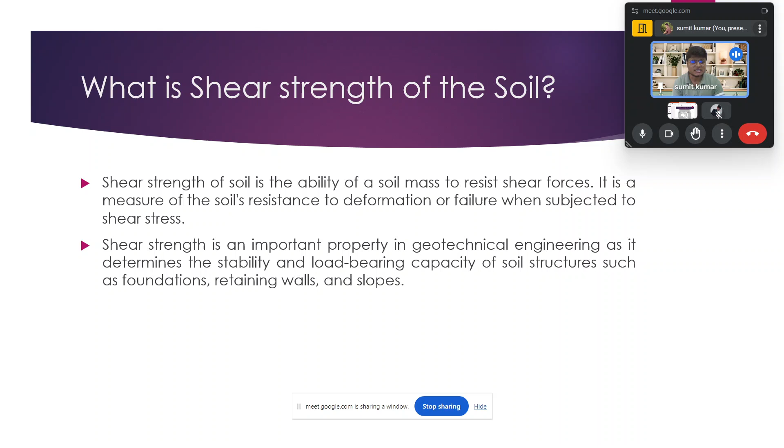So, what is the shear strength of soil? We have understood why shear strength matters. The shear strength is the ability of a soil mass to resist shear forces, and is a measure of resistance to deformation or failure when subjected to shear force or shear stress. So shear strength is an important property in geotechnical engineering. We also understood the parameters on which shear strength depends, like cohesion and angle of internal friction, and how they give strength to the soil.

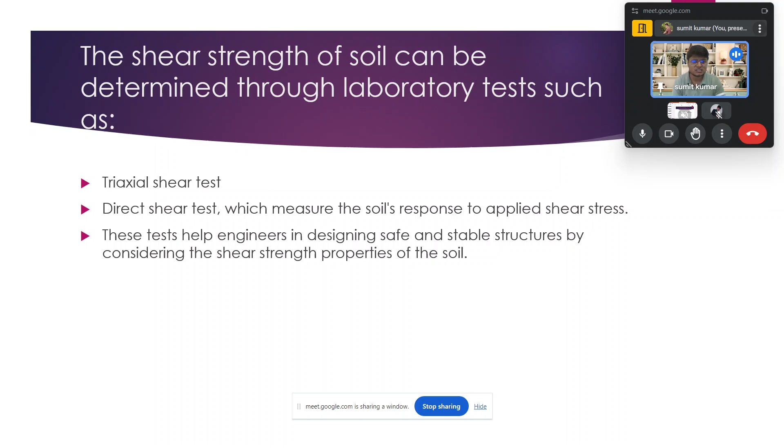We came to know about some tests like the triaxial test, direct shear test, box test, and many more tests, including shear tests. We will come across those tests during this class and subsequent classes, because this week and next week we are covering those tests, and then we move forward.

Apart from that, we understood the importance of studying this topic, the importance of studying shear strength, because during the first session I said that whatever we study must have some purpose, must have some understanding of why we are studying it.

Is there any importance of studying those things? From our childhood, whatever we are doing, we always ask questions. As a child, we have a thought process to ask questions on everything we see, but as we grew up we forget that habit of asking questions. But whether you are studying or doing anything, you have to ask yourself: what is the importance, why, what and why are the most important perspectives one needs to ask during their study or any work, in an organization or anything you are doing. So what and why are some of the most important things one needs to ask themselves in order to reach a solid conclusion.

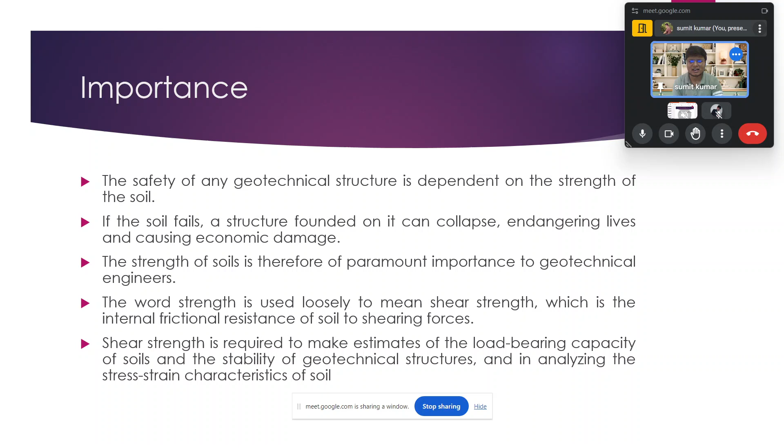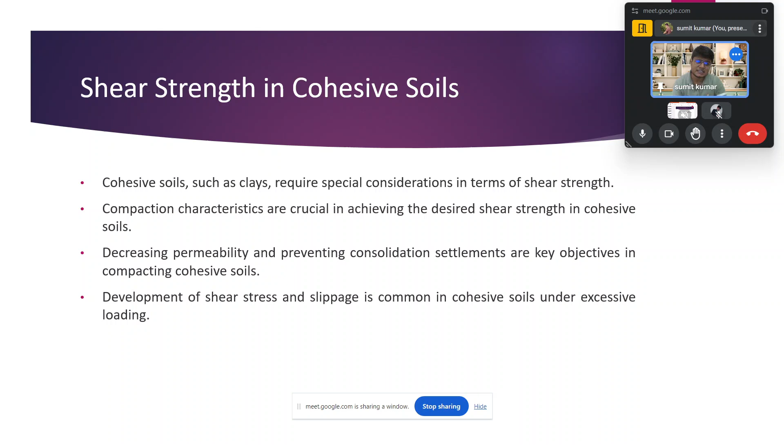Okay, so that's not part of the syllabus, I just added that. So we have understood the importance. Apart from that, we have understood the shear strength in granular soil, that is sandy soil, how it provides the strength. And in addition, we also understood in cohesive soil how the intermolecular force of attraction, or how the excessive loading, impacts the shear strength in that type of soil.

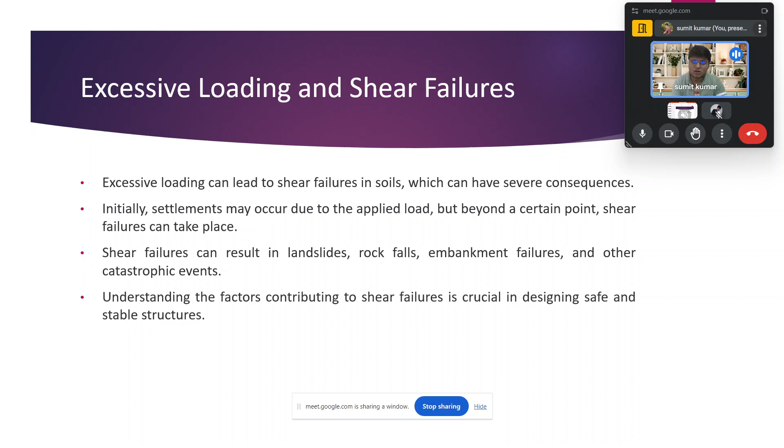Okay, so we will see about those things as well during our tests, like the direct shear test and the triaxial test. Apart from that, we have understood about factors like the state of stresses in soil, that is the normal stress, shear stress, and the interrelation like shear strength equal to C plus sigma tan phi.

After moving from here, we go across some of the important things like the Mohr circle, and the Mohr circle is one of the most important things. So we understood the state of stresses like the maximum principal stress, minimum principal stress, and on the basis of that we developed understanding of how the Mohr circle problem is solved. And I also gave you some problems during our last class, which I think you have gone across, so you get a better understanding.

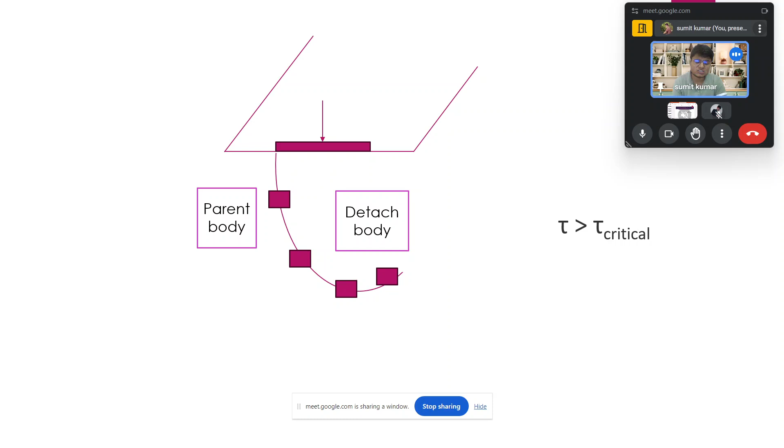And when I say this, those people who have gone through YouTube, or maybe who are going through YouTube at this point of time, you need to understand that solving the problem by yourself, by your hand, is very much important when you are developing understanding about any topic. Because if you have command on theory but you are not solving numerical problems, the practical implementation, you are not able to achieve the develop the understanding.

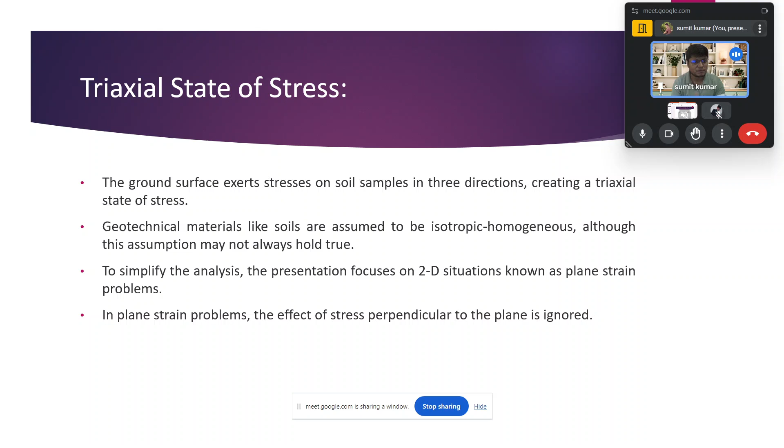So okay, we have talked about these things. We have talked about the triaxial state of stress. We have understood how we combine - actually the factor takes place in the field in 3D, but how we are taking it as 2D and solving the problems through the Mohr circle. What is the maximum principal shear stress, minimum shear stress, we have understood, and the interrelation to find the shear strength and normal stress is also understood by us.

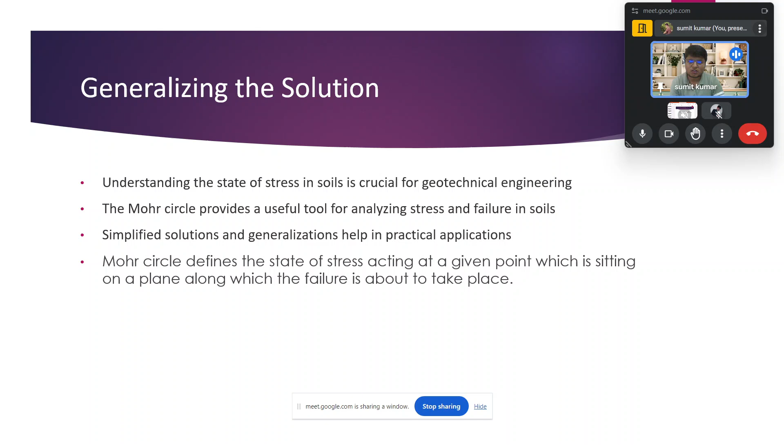Apart from that, we have seen the property of the Mohr circle and the sign convention to understand the Mohr circle. Moving forward, we have developed a generalized solution in Mohr circle analysis. What is the major principal stress and minor principal stress is understood by us. And afterwards, through this diagram which is over here, you understood that how...

in a Mohr circle, we are able to find the major and minor principal stress. And what do we mean by that? What do we mean by the zero shear plane? And how are we able to find the radius of the Mohr circle? All these things are covered here in very detail during the previous class.

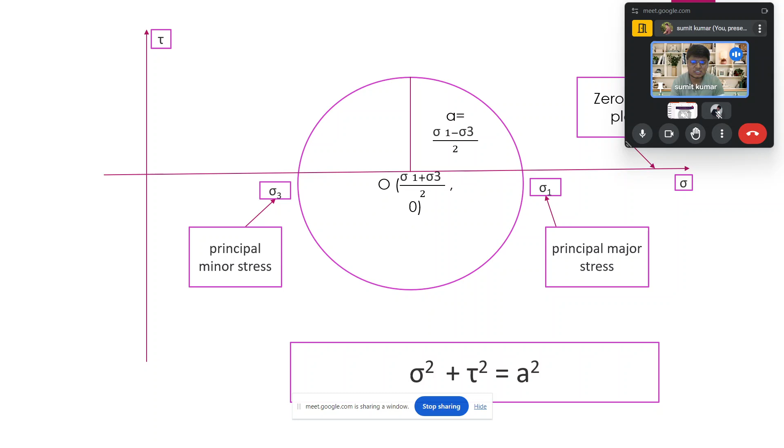And up to this, I wanted to revise the concepts with you. Apart from that, the interrelation to find the maximum principal stress and the minimum principal stress is also presented, and the angle formed between them, or the plane at which it is occurring from the current plane, is also found through this Mohr circle. So we have understood those concepts, and now we will move forward to our next concept which we are discussing right now. Okay, I think up to here everything is clear for everyone.

Okay, I feel there will be no problem in anyone's mind. So, we are talking about the Mohr-Coulomb failure criteria. In the last class, at the end, we talked about this thing as well.

We talked about how the shear strength is a function of normal stress, that is sigma, and how we calculated sigma in the previous class. So when the cohesion and angle of internal friction are known to us, we calculate the shear strength as C, that is cohesion, plus sigma tan phi, where phi is the angle of internal friction.

With the help of this interrelation, we understand the shear stress on the failure plane. The interrelation S equal to C plus sigma n tan phi, where C is the cohesion, sigma n is the normal stress, and phi is the angle of internal friction, gives the shear stress at the failure plane.

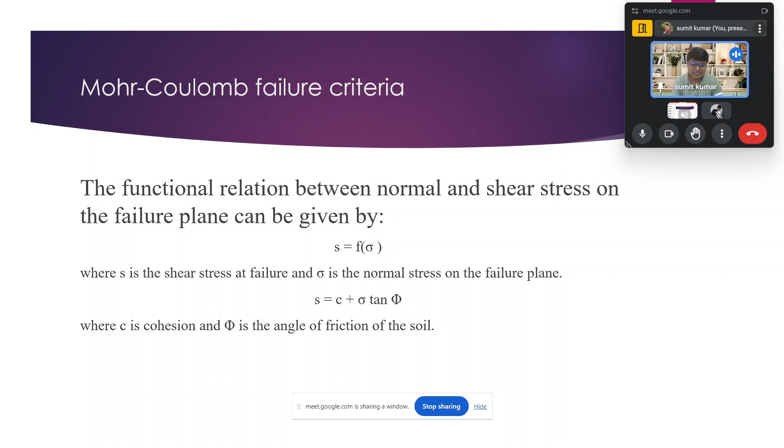We will talk about this interrelation very often at many points as we move forward. Okay, now let's understand through this diagram what we want to convey.

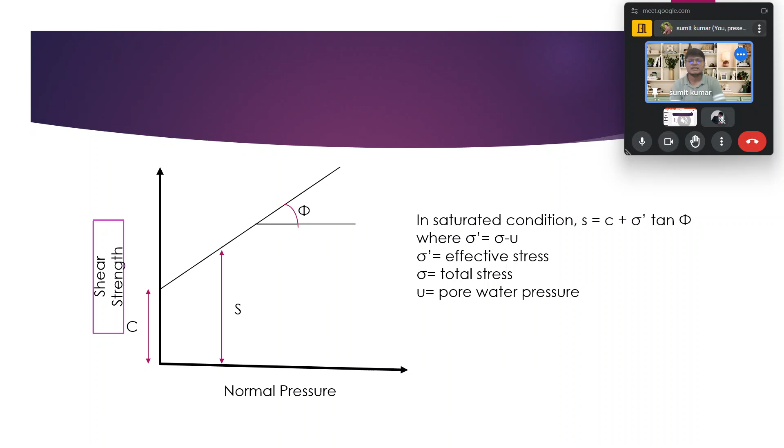Now we will talk about some key concepts. I have talked about some key concepts in the previous class, so I will take that over here, then move ahead. We have talked about the shear strength of soil. The key concepts are shear strength, effective friction angle, what is meant by cohesion, what is meant by apparent cohesion. I will give a one-line definition for everything, and that will be there in the presentation which will be shared with you. I will give one-line definitions and then move ahead. I think I am audible.

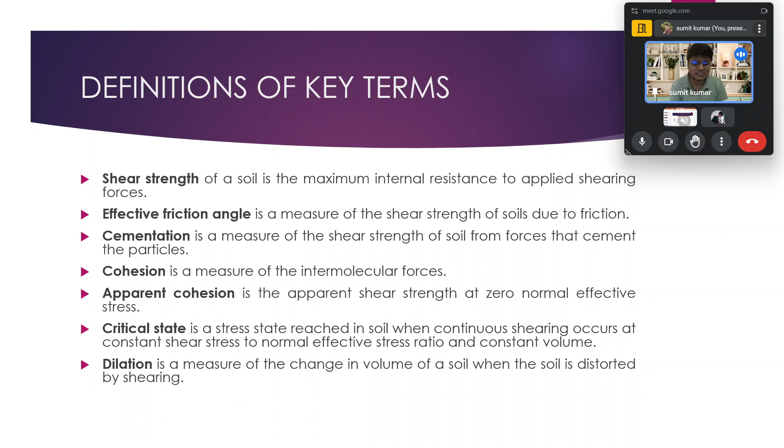Dilation, as the name suggests, is the change in volume. It is a measure of change in volume of soil when the soil is distorted by shearing. Whenever you have gone across any software packages, you have seen that they ask the value of cohesion, friction angle, modulus of elasticity, Poisson ratio, and apart from that, they also ask about the dilation angle. So dilation means how much change in volume capacity affects the soil in one way or the other. That factor is one of the most important things. I think up to here everything is clear.

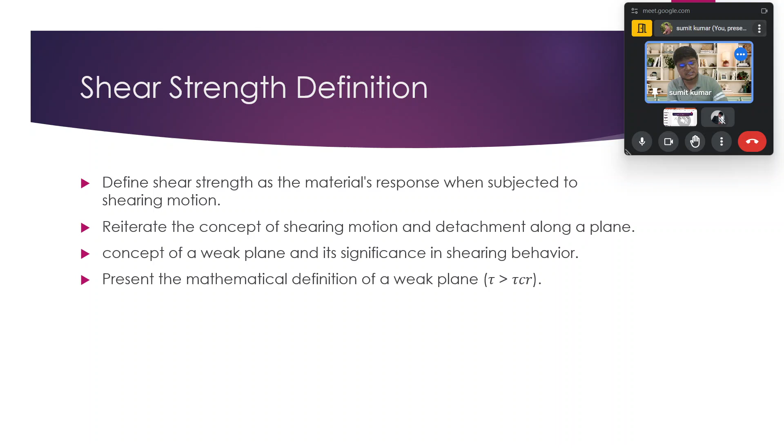Now we move to the next slide, and you can see in this slide there is a simple term written over here, that is the shear strength definition. We define shear strength as a material response when subjected to shearing motion, because there is strength within the soil, but it comes as a response when we apply stress over there. So shear strength is a material response when subjected to shearing motion, and the concept of shear motion and detachment along a plane. It is a concept of a weak plane and is significant in the shearing behavior. Mathematically, when we talk about a weak plane, the shear stress applied is above the critical shear strength, then it will lead to failure along that plane.

Now we talk about the factors. There might be some factors which are key aspects due to which the failure takes place across any plane or the other. So what are those factors? You need to know, yes or not? Yes.

So we talk about the factors. The major factor causing the shearing is earthquake. There are many factors, but during an earthquake the shear strength gets disturbed. We talk about liquefaction, where the shear strength gets reduced from the value it needs to have. Earthquake can lead to relative motion between soil layers, and if relative motion is there, the stress applied on the plane must be more than the strength of the soil at that plane.

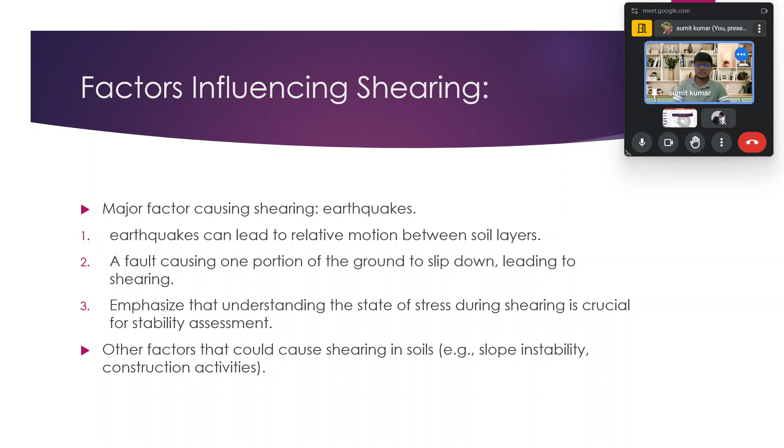Now we talk about some of the applications and significances. Talking about applications, the engineering significance of understanding shear strength in geotechnical projects: shear strength analysis helps in designing foundations, retaining walls and slopes. The role of shear strength is most important in assessing the stability of natural and man-made structures.

When we talk about natural and man-made structures, we mean human activity like construction and expansion can alter the state of stress in the soil mass, which leads to problems at those places. We also talk about incremental changes in stress that can lead to shearing, especially along weak planes. So its significance is also very high.

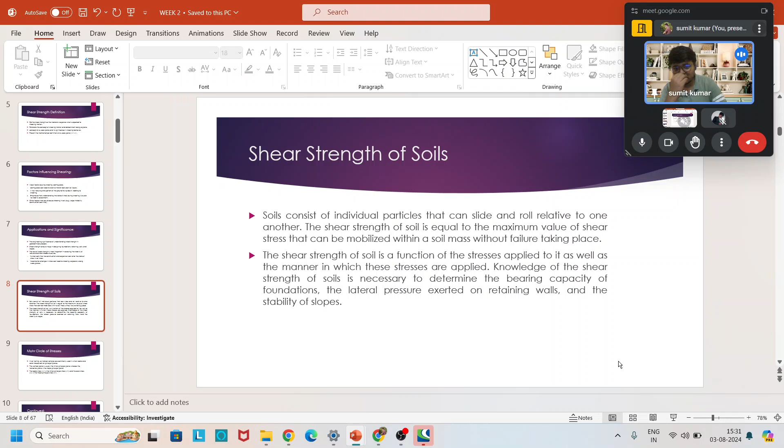We talk about the shear strength of soils. The soil consists of individual particles that can slide and roll relative to one another, and the shear strength of soil is equal to the maximum value of shear stress that can be mobilized within a soil mass without failure taking place.

The shear strength of soil is a function of the stresses applied to it as well as the manner in which the stresses are applied. Knowledge of shear strength of soil is necessary to determine the bearing capacity of the foundation, the lateral pressure exerted on the retaining wall, and the stability of slopes.

As I have discussed this point in the previous class as well, shear strength is the most important factor before moving ahead with any construction work—whether that work is going on at any site, be it development of infrastructure projects, or construction of any institutional or residential building.

Before that, the soil report is very important, and the soil report consists of parameters like cohesion and angle of internal friction. On the basis of that we determine the strength, and we are able to tell how much load the soil can sustain. If we need more than that, we need to improve the soil for that condition by replacing the existing soil at that site with new soil, or by providing some improvement in the soil in order to sustain the load we want to apply at that site.

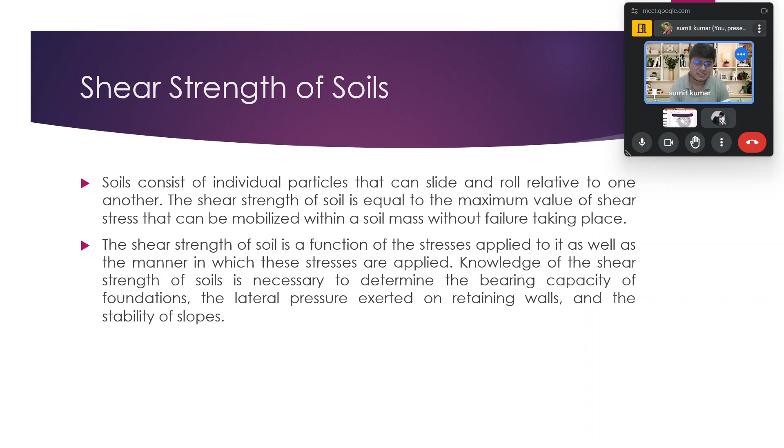And it is valid for all projects like road construction, railway construction, or any other construction. So it is one of the most important factors.

When we talked about the Mohr circle in the previous classes—in soil testing, cylindrical samples are commonly used in which the radial and axial stresses act on principal planes. The horizontal plane is usually the major principal plane, whereas the vertical plane is the minor principal plane. When we talk about radial stress, its representation is sigma r, which is the minor principal stress.

This is also said to be sigma 3, and the axial stress sigma a is the major principal stress, which is also said to be sigma 1.

Okay, now I will show you one of the images from which you can see that the axial stress is sigma A, which in this case is the major principal stress, and sigma 3, the radial stress, is sigma R, which represents the minor principal stress. And over here you can also see the theta angle. Just for clarity, I have shown this image to you.

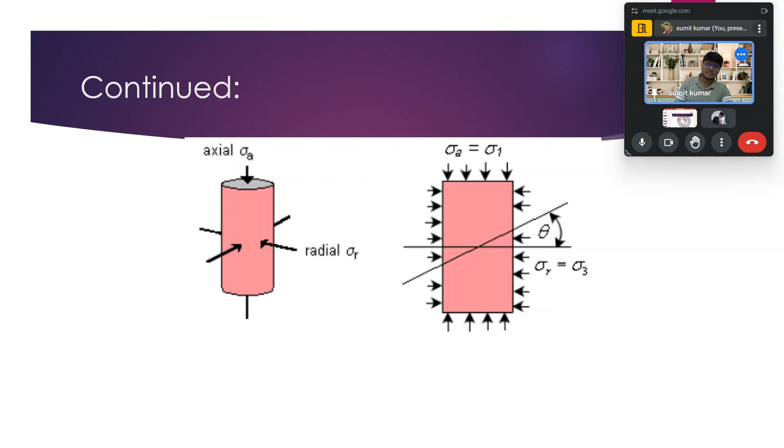Now I will talk about the Mohr-Coulomb failure criteria. There must be some criteria due to which the failure takes place. What is that criteria? We are going to discuss that.

When the soil sample has failed, the shear stress on the failure planes defines the shear strength of the soil. As we discussed in our previous session, the soil has some strength and it fails when the stress applied on that section bypasses that value. So how do we come to know it has bypassed the value it can hold?

There is a very simple example of that. Suppose a soil section, or a simple example like this box. This box has strength to bear a load of 100 kilonewton. When we apply that load on it, after the application of 100 kilonewton, it will move. So its strength is 100 kilonewton.

At a value up to 99.99 kilonewton, it can resist, up to 100 kilonewton it can resist, but if we apply 100.01 as well, it will not be able to resist that much force and it will start moving in that direction.

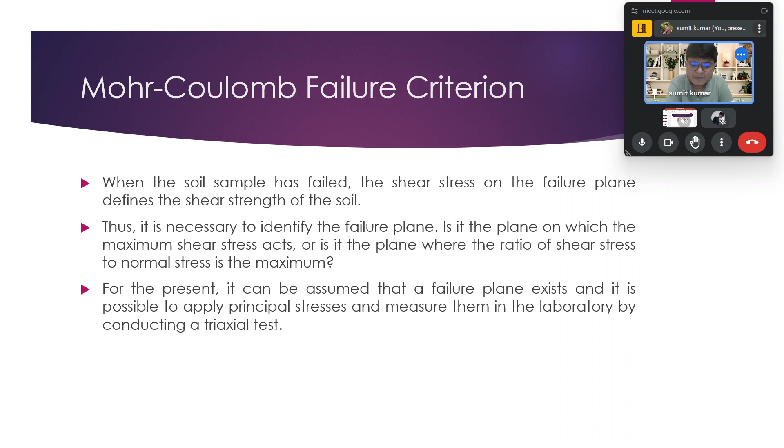We have talked about the triaxial test in previous classes as well. We are going to discuss what the triaxial test is in this class too, but in more detail in the subsequent class, the next class. A little bit we will touch upon the triaxial test in this class as well.

Now you can see that the Mohr circle of stress at failure of the sample can be drawn using the known value of principal stresses. As we know, if we know sigma 1 and sigma 3, we can find the center coordinate and radius, like sigma 1 minus sigma 3 by 2, which is the value of maximum shear stress. We can plot that section on the horizontal axis.

We saw in the previous class, in the four problems, that a zero radius Mohr circle is also formed on the x-axis, on the positive and negative x-axis. We also saw a Mohr circle formed where the center coordinate is 0,0 and the radius is sigma. So we have seen everything.

If data from several tests carried out on different samples up to failure is available, a series of Mohr circles can be plotted. We will see three Mohr circles plotted, and on that basis sigma 1, sigma 2, sigma 3 can be found. It is conventional to show only the upper half of the Mohr circle because it is symmetric about the x-axis, and a line tangent to the Mohr circles can be drawn, which is called the Mohr-Coulomb failure envelope.

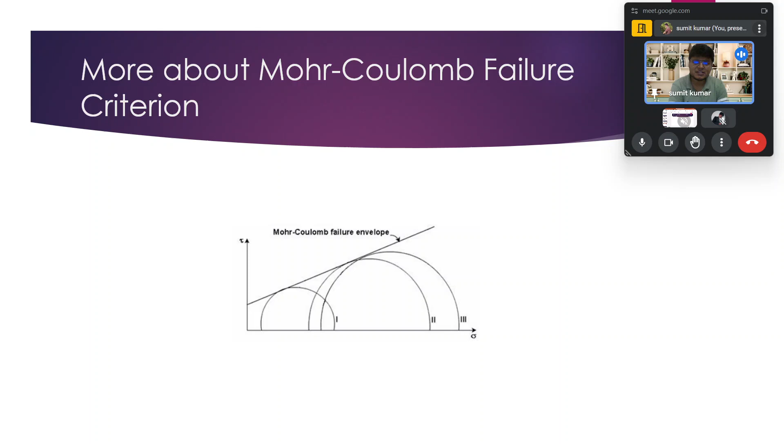Now we will move ahead in the same direction and we will see... sorry, excuse me for a minute.

Now we are talking about the Mohr-Coulomb failure criteria, and you have seen all the diagrams as shown on your screen. If the stress condition for any soil sample is represented by a Mohr circle that lies below the failure envelope, every plane within the sample experiences a shear stress smaller than the shear strength of the sample. Thus, the point of tangency of the envelope of the Mohr circle at failure gives the clue to the determination of the inclination of the failure plane.

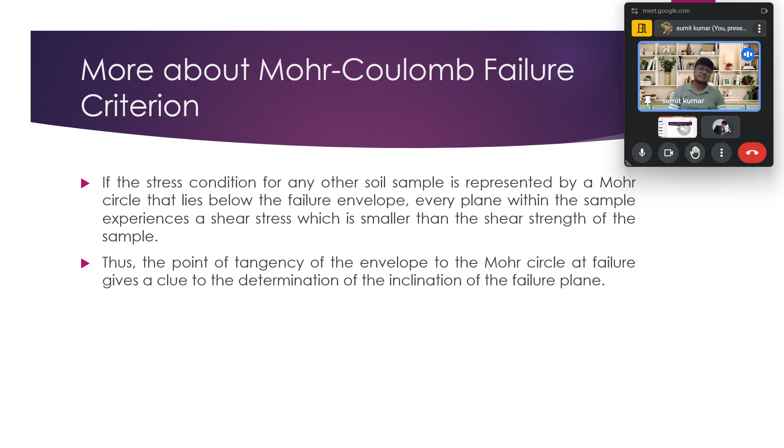Now we will talk about the different types of tests we are going through as we move ahead. Different types of tests for shear strength are performed. What are those tests? One of the most important questions is what tests we are going to perform to find the shear strength.

Some of the most common tests are the shear box test, which is nothing but the direct shear test, and the triaxial test, which is one of the most important tests, but it takes time and requires patience and some expertise, because we need to understand the Skempton parameter before making our sample. So this is also a tricky test.

Another test is the Vane shear test. Apart from that, these three tests are the most famous ones performed, but mostly the direct shear test and the triaxial test are used. Apart from that, the torsion shear test, ring shear test, and penetration tests are also there. We will discuss the first three tests in detail, and the rest are just for information.

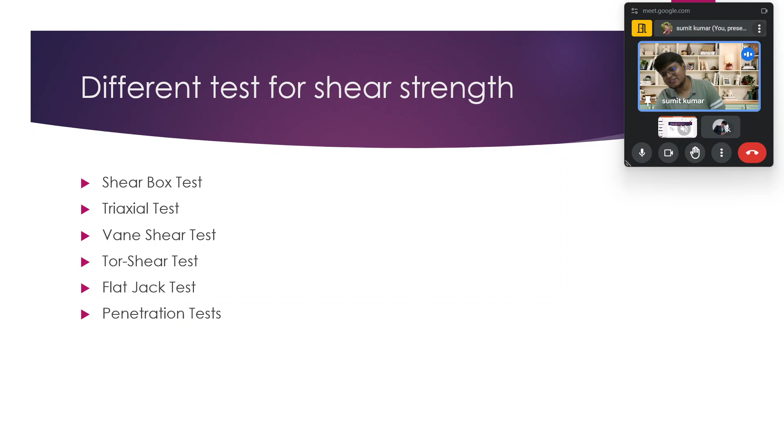One line definition we will discuss for each test, and afterwards we will move ahead. By the end of today's class and in the coming classes, we are going to discuss the first three tests in great detail - how it's possible, what interrelations we will develop, and how we will achieve the shear strength parameters from these tests to find the shear strength of the soil.

Okay, so first of all, let's talk about the shear box test, which is the direct shear test. In this test, the 2D simulation of soil condition provides a plane strain or plane stress representation of the shearing behavior.

It has a limitation in replicating the real world 3D condition because there is already a predefined failure plane in this test. So that is also one of the big limitations.

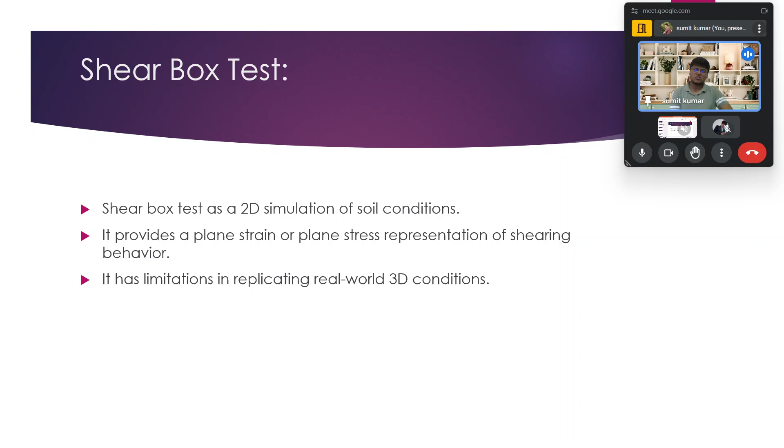When we talk about the triaxial test, it is a 3D test because the stress is applied from all directions. The cylindrical specimen gets formed in a membrane, and that is kept in a closed cylindrical box, the triaxial apparatus.

The stress is acting from all directions on the cylinder, so it represents a real life condition. When we take soil from the ground at any cross section, we see soil is surrounded by soil itself, and the soil particle and its adjacent soil particle apply pressure on each other. That actual condition we try to develop in the laboratory during the triaxial test.

Apart from that, stress from the vertical direction is also applied, which represents the real life situation when any construction work is above that soil mass. So in the triaxial test, this is one of the most important aspects that takes care of the practical implementation of those things. I think up to this everything is clear.

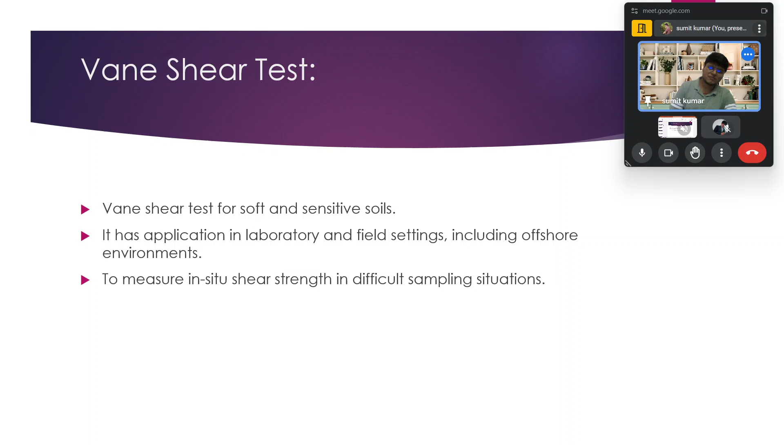When we talk about the next test, shown earlier, it is the tor-shear test. It overcomes the limitation of the shear box test at higher shearing levels. It includes the torsion test as a method to apply high magnitude strain to the sample, and its significance is in studying material behavior at elevated shearing levels.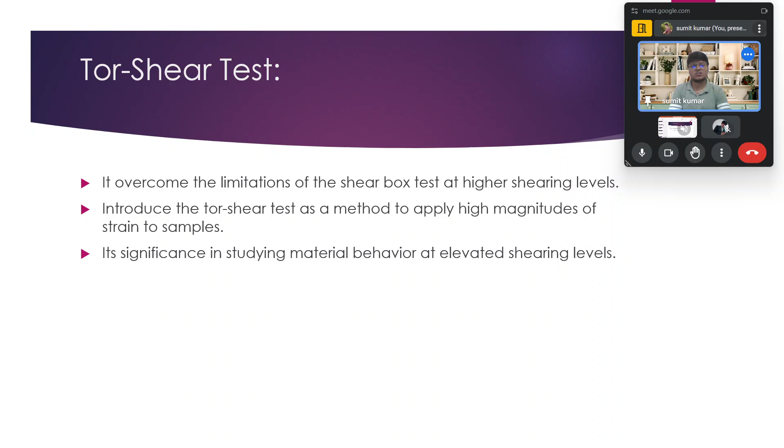When we talk about the flat jack test, it is used in rock mechanics for foundation design, and it has relevance in assessing the stability and strength of the rock strata. The application of the flat jack test is in the design of hydroelectric power plant structures.

So these are not that important tests. Yes, the penetration test is a little bit important because it is also one of the tests performed in every soil report. As I discussed in my first session, in every field report some information is mandatory, and the values of the standard penetration test or SCPT test are also there.

So the penetration test is a method to assess the substrata worthiness for the foundation. Different types of penetration tests, including SPT and SCPT, are performed, and these tests provide information about the shear strength properties of the materials. I think up to this it is clear.

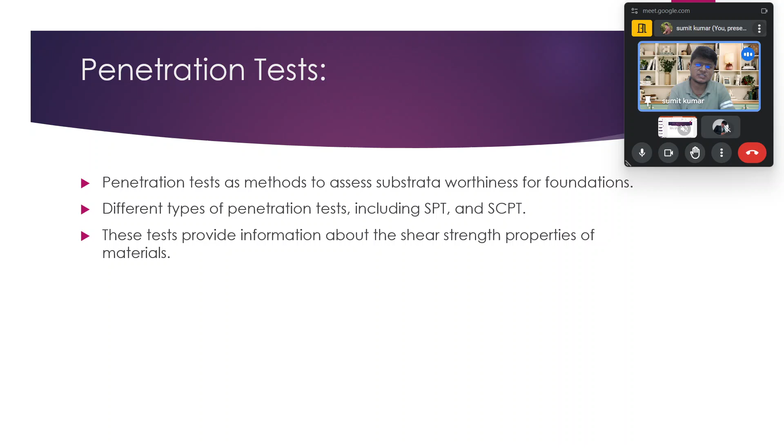Now we talk about methods of shear strength determination. We will discuss two of the tests, the direct shear test and the triaxial test.

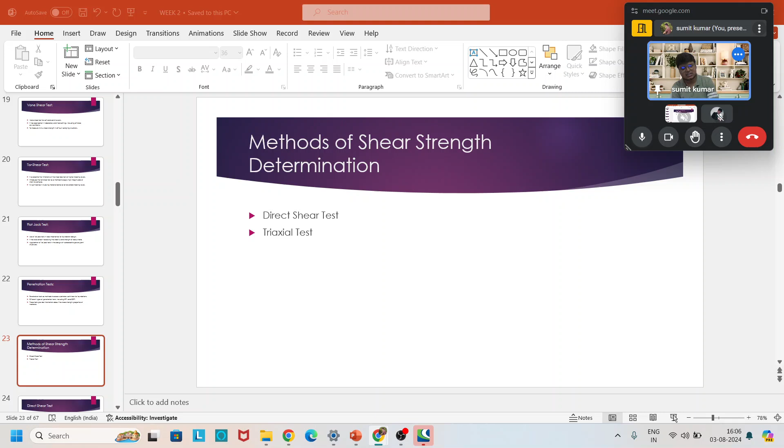So the two methods are the direct shear test and the triaxial test. Now we will see what is the direct shear test.

The test is carried out on a soil sample confined in a metal box of square cross section, which is split horizontally at mid height. This is one of the most important limitations of the direct shear test: it has a predefined failure plane. Since it's split horizontally at mid height, failure takes place from that section only, and it's not necessarily the case that soil in the field fails from this same plane. But in the direct shear test, this is one limitation - it needs to be carried out in the metal box with a square cross section split horizontally at mid-height.

A small clearance is maintained between the two halves of the box, which are split horizontally. Soil is sheared along a predetermined plane by moving the top half of the box relative to the bottom half.

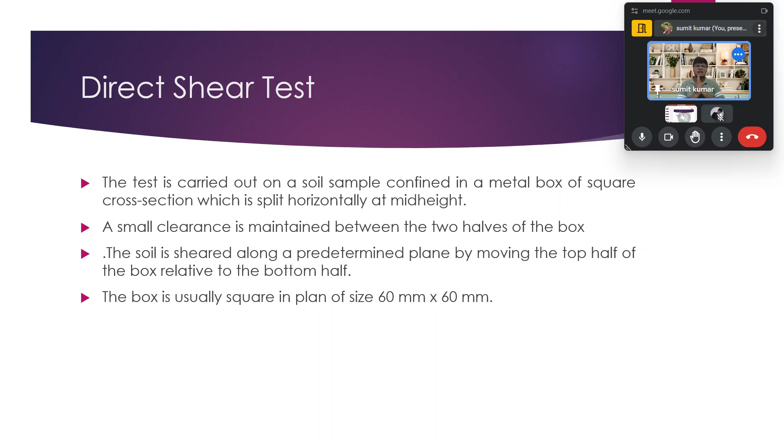The metal box of square cross section has a size of 60 mm by 60 mm in general. You can see this diagram which represents the typical shear box.

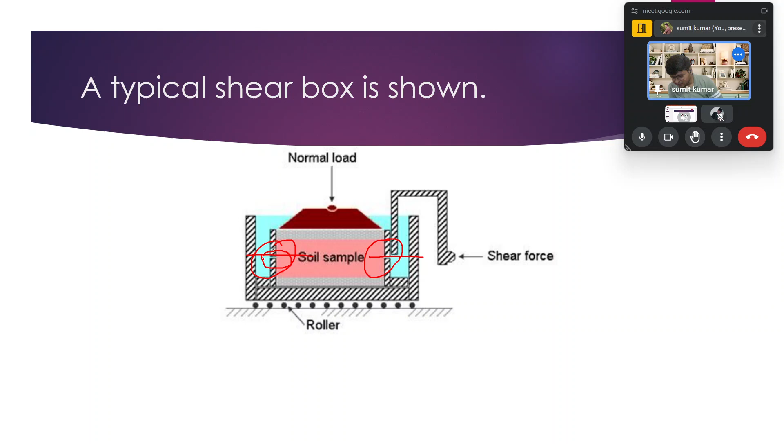The normal load is applied here, and in this section the box is allowed to move in the horizontal direction. You can see the cross section here - this is the section where the sample gets moved. The predefined section is there from which failure can take place. You need to be aware that this is one of the limitations from where failure could take place.

Now we will discuss the conditions required to perform this test. If the soil sample is fully or partially saturated, perforated metal plates and porous stones are placed below and above the sample to allow free drainage, because a drainage condition needs to be provided to perform the test under actual conditions. If the sample is dry, solid metal plates are used since no perforation is needed, as no water needs to flow out. A load normal to the plane of shearing can be applied to the soil sample through the lid of the box.

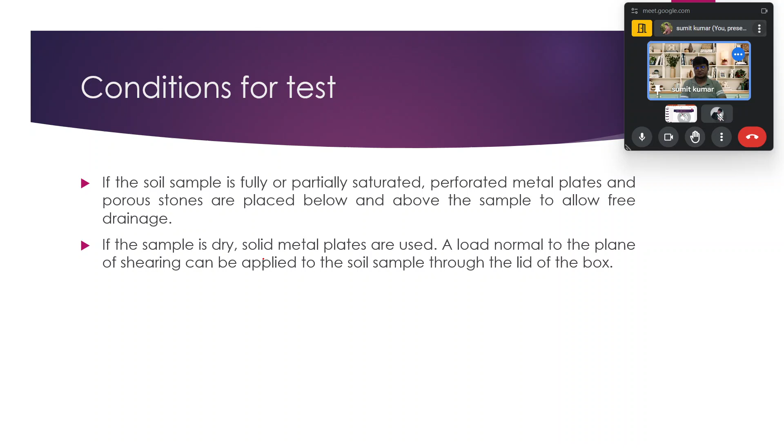When we talk about the test on sand and clay, the test on sand and gravels can be performed quickly and is usually performed dry, as it is found that water does not significantly affect the drained strength. For clay, the rate of shearing must be chosen to prevent excess pore pressure building up.

Now let's talk about the procedure of the test. A vertical normal load is applied to the sample, and the shear stress is gradually applied horizontally by causing the two halves of the box to move relative to each other, as you can see in the picture on your screen.

The shear load is measured together with the corresponding shear displacement, and the change of thickness of the sample is also measured.

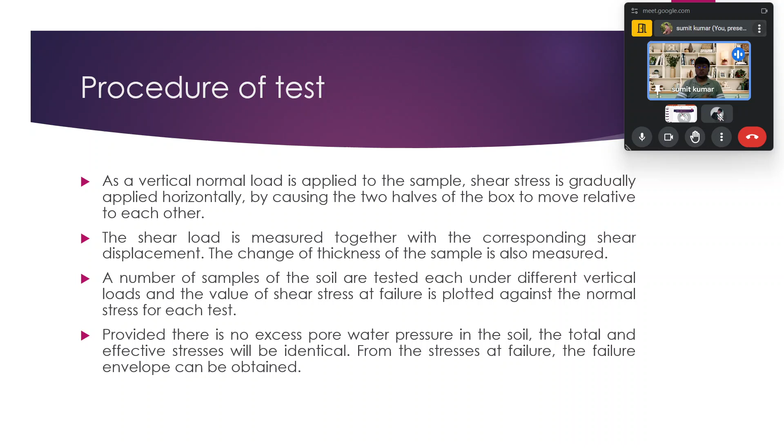When we talk about the failure envelope, the stress up to which it lies below the failure envelope will not cause failure. But when the stress applied touches or goes above the failure envelope, failure takes place instantly.

Now we will talk about the advantages. There must be some advantages and some disadvantages of this test. As I mentioned earlier, one of the disadvantages is the predefined failure plane. So first we discuss the advantages, then the disadvantages.

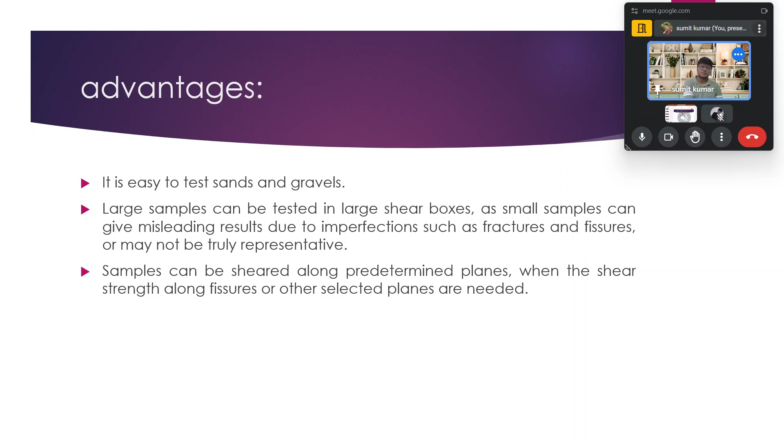It is an easy test for sand and gravels. Large samples can be tested in large shear boxes, as a small sample can give misleading results due to imperfections such as fractures and fissures, or may not be truly representative. The sample can also be sheared along predetermined planes when the shear strength along fissures or other selected planes is needed. So these are some of the advantages.

The soil section always fails in that direction only, after the application of the normal load and the soil sample starts moving. So this may not be the weakest plane, and there is maybe a 50% or 60-40% probability that the plane through which we fail the soil is not the weakest plane.

So suppose we have the predetermined plane for failure, and suppose that plane is the strongest plane, then the strength which comes from that plane is much higher than for other sections. If we cut the soil from any other place, the strength there might be less than what we found from that predetermined section. So in that case, there is a problem.

When I talk about the problem, think about what it is: at that section, the strength we reported is higher than for other sections, so that section is not the critical section. In actual field conditions, the soil may get fail below that stress level, below the strength we reported. So that is one of the reasons, one of the limitations — it may not be the weakest plane in the sample.

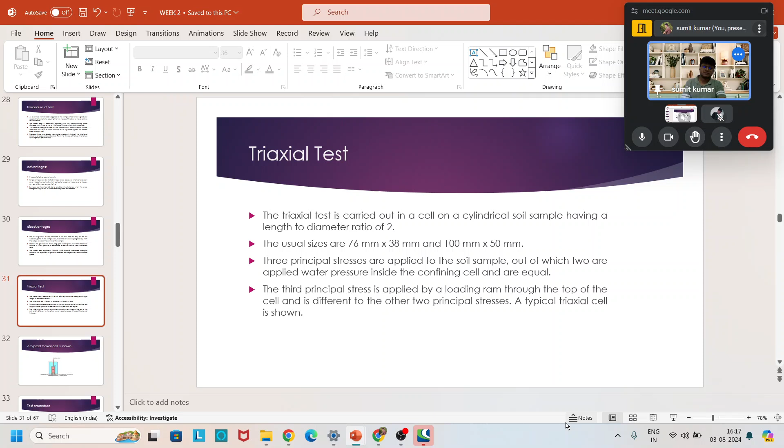The triaxial test is carried out in a cell on a cylindrical soil sample having a length to diameter ratio of 2. The size of the sample is usually 76 mm into 38 mm, where 76 mm is the height and 38 mm is the diameter. Another sample size is 100 mm into 50 mm, where the height is 100 mm and the diameter is 50 mm.

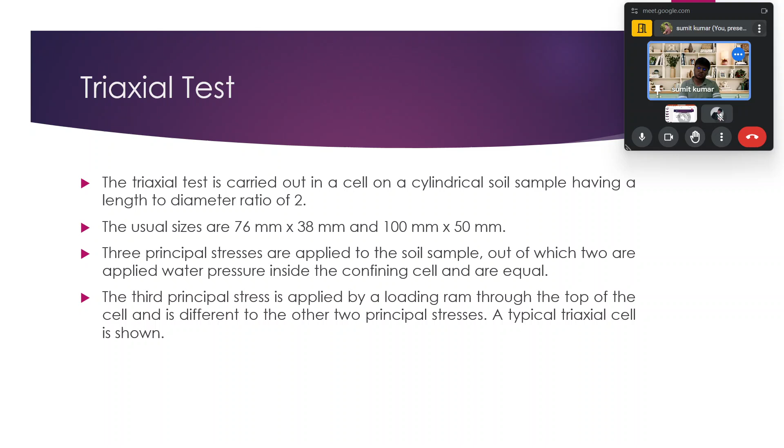In the triaxial test, three principal stresses are applied on the soil sample, out of which two are applied through the water pressure inside the confining cell and are equal. The third principal stress is applied by the loading ram through the top of the cell and is different from the other two principal stresses. A typical triaxial cell could be seen in our next slide.

The sample, which is of size maybe 100 into 50 mm or 76 into 38 mm, is kept in the triaxial apparatus. Two stresses are applied: the confining pressure sigma 3 is applied all around with the help of water.

You should understand how the stress works. When it acts on the sample, water is filled into the cell and stress is applied from all directions — that is called sigma 3. Afterwards the deviatoric stress is applied from the top — that is sigma d, which equals sigma 1 minus sigma 3, as sigma 3 is already known since we are applying it through the confining pressure of water.

So sigma 1 could be calculated, as we also know how much deviatoric stress is applied on the sample. Sigma 1 minus sigma 3 equals sigma d, so sigma 1 equals sigma 3 plus sigma d. That's the understanding of this problem, and I think at this point things are clear for everyone.

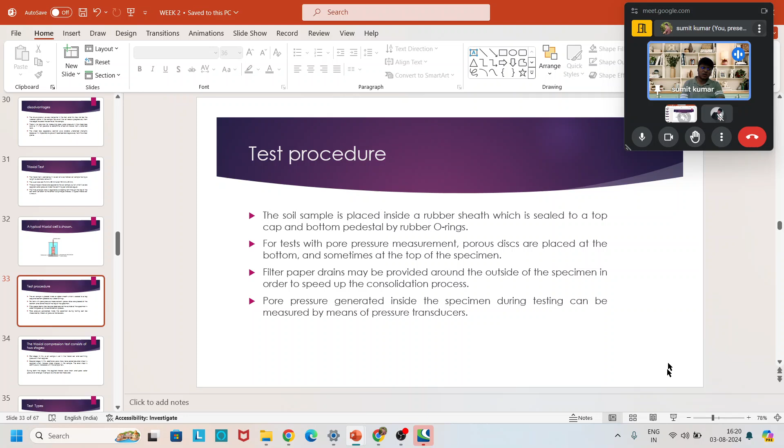Now we will move on to the test procedure. So what is the test procedure?

We are talking about the test procedure. As we discussed the procedure of the direct shear test, we also need to understand the procedure of the triaxial test. The soil sample is placed inside a rubber membrane, sealed at the top cap and bottom pedestal. Porous discs are placed at the bottom and sometimes at the top of the specimen.

Filter paper drains may be provided around the outside of the specimen in order to speed up the consolidation process. Pore pressure generated inside the specimen during the test can be measured by means of pressure transducers.

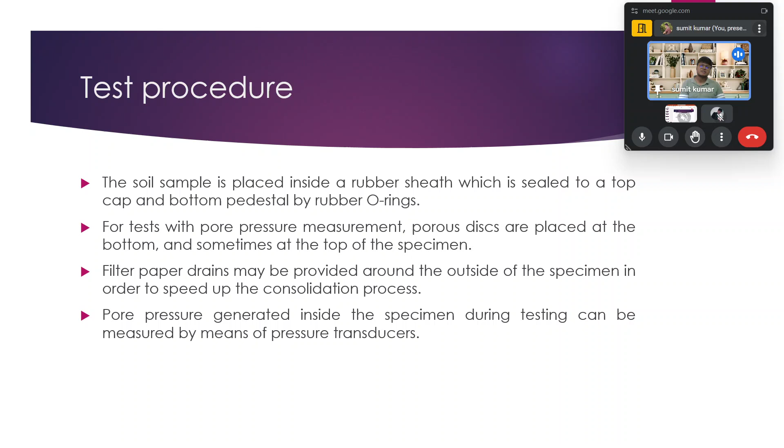There is a special provision so that we could calculate everything, such as how much pore water pressure gets developed. With this, we are able to find all the parameters, like the effective strength parameters and the total strength parameters.

Now let's talk about the triaxial compression test, which consists of two stages. The first stage is when the soil sample is set in a triaxial cell and a confining pressure is then applied, and that confining pressure is nothing but sigma 3.

In the second stage, the additional axial stress, also called the deviatoric stress, is applied, which induces the shear stress in the sample, and the axial stress is continuously increased during the test.

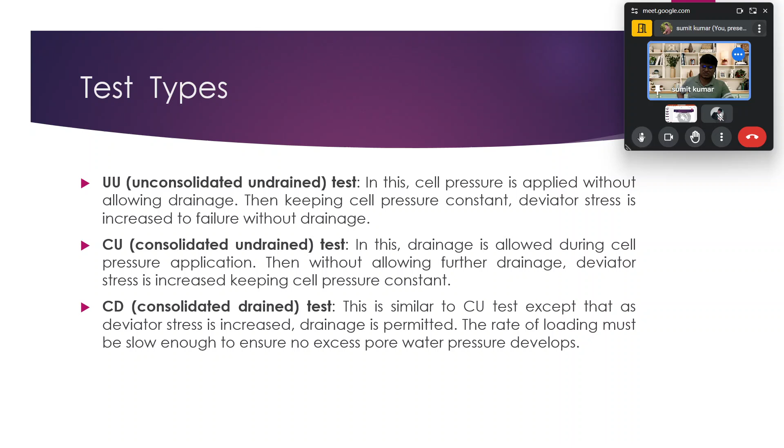Now we talk about significance. As we already said, whenever we talk about any test or procedure, we talk about its importance or significance, its advantages and disadvantages, so we are able to develop our understanding at this point in time. So we are talking about the significance of the triaxial test.

Then we will move to the advantages over the direct shear test. Afterwards, we will take some real life examples in which we calculate the values and interrelate those values for our understanding.

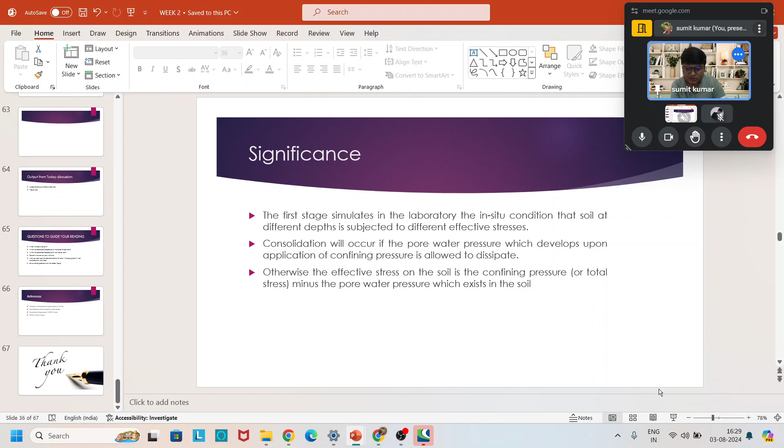I think so. Okay, so I am talking about the significance.

So I am talking about the significance. The first stage simulates in the laboratory the condition that the soil at different depths is subjected to different effective stress. Afterwards, consolidation will occur if the pore pressure which develops upon application of the confining pressure is allowed to dissipate.

Otherwise, the effective stress on the soil is the confining pressure or total stress minus the pore water pressure which exists in the soil. I have discussed this point at one point earlier when we were discussing the relation S equal to C plus sigma tan phi, clearly stating that the value of pore water pressure needs to be subtracted from the total stress to find the effective stress.

You develop the interrelation between those things. The first stage simulates in the laboratory the in-situ condition where the soil at different depths is subjected to different effective stress, and afterwards consolidation occurs if the pore water pressure which develops upon application of the confining pressure is allowed to dissipate. Otherwise, the effective stress on the soil is the confining pressure, or total stress, minus the pore water pressure which exists in the soil.

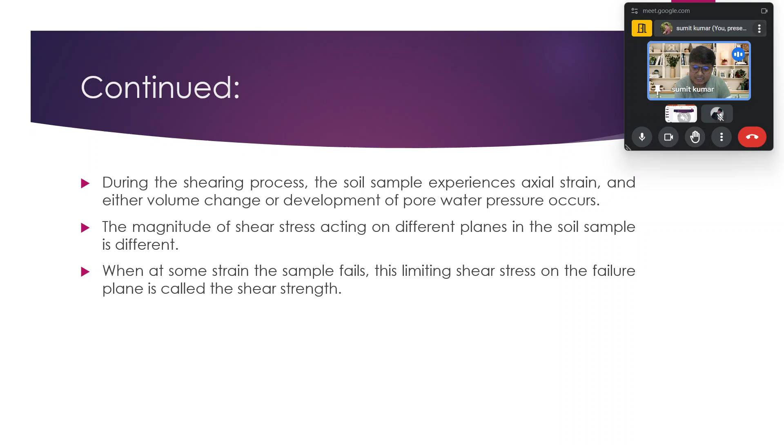Now we talk about the advantages over the direct shear test. The soil samples are subjected to uniform stress and strain, and different combinations of confining and axial stress can be applied. Drained and undrained tests can be carried out, pore water pressure can be measured in the undrained test, and the complete stress-strain behavior can be determined.

Now, regarding the many advantages of the triaxial test over the direct shear test: the stress and strain act uniformly, as we have seen. The load is applied from the vertical direction. How is the stress and strain uniformly acting? As we made the sample, we kept it in the fluid box, and the confining stress is applied from all directions very uniformly. That's why the stress and strain is subjected in a uniform manner.

There are different combinations of confining and axial stress that can be applied, as we have seen with UU, CU, and CD - different drainage conditions can be applied at any point of time. Regarding pore water pressure being measured in the undrained test - if the pore water pressure can be measured, we are able to determine the total stress parameter and the effective stress parameter, and the complete stress-strain behavior can be determined.

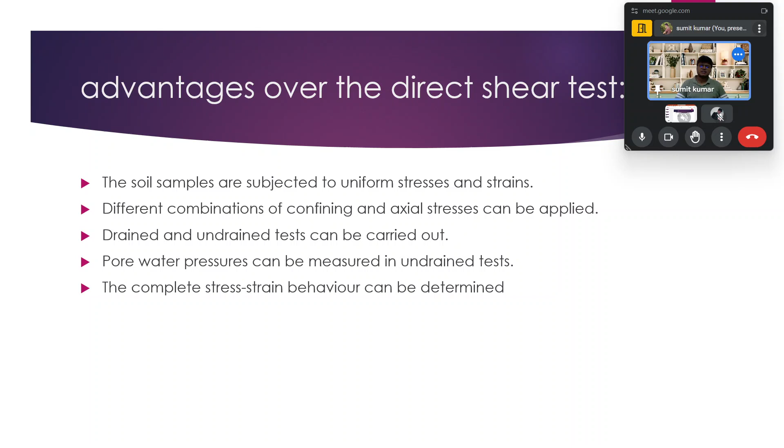Now we will talk about the total stress parameter. When we talk about the total stress parameter, in the UU test - that is the unconsolidated undrained test - the value of phi is found to be 0. Why? A question may arise.

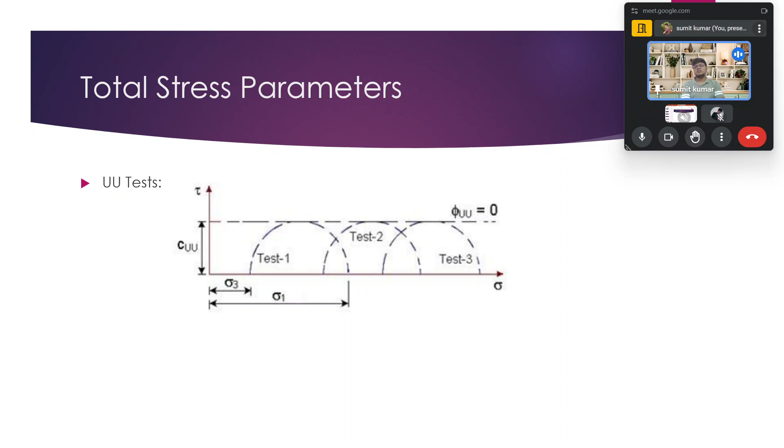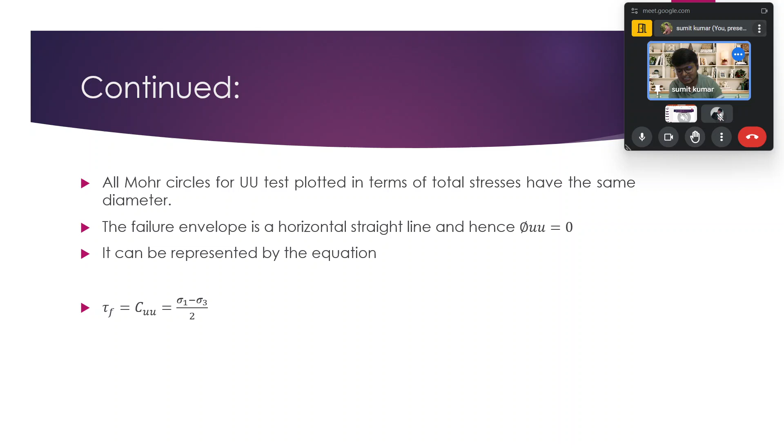When we talk about this, the Mohr circles of the UU test plotted in terms of total stress have the same diameter. If you plot in terms of total stress, it will have the same diameter. When you plot in terms of effective stress, things get changed, and the failure envelope is a horizontal straight line, hence phi UU equals 0. It can be represented by the equation tau f equal to Cu, equal to sigma 1 minus sigma 3 by 2, as phi equals 0. So tau equal to C plus sigma tan phi, and since phi equals 0, tau equal to C. That's why this relation has been mentioned here.

When we talk about the test involving drainage in the first stage, when the Mohr circles are plotted in terms of total stress, the diameter increases with the confining pressure. The resulting failure envelope is an inclined line with an intercept on the vertical axis.

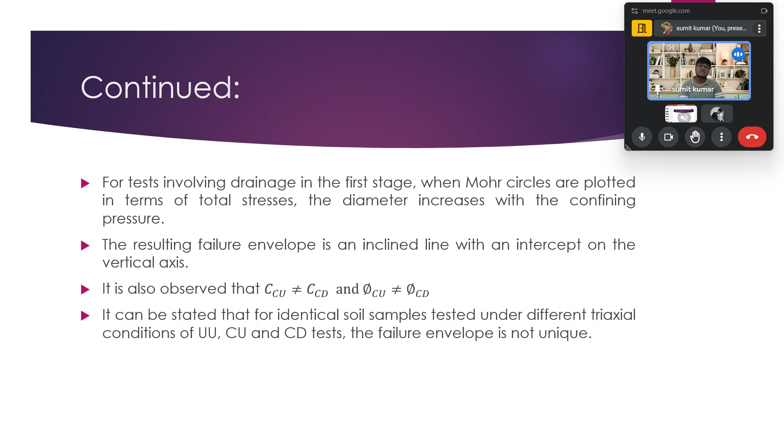It is also observed that c CU is not equal to c CD, and phi CU is not equal to phi CD. It can be stated that for identical soil samples tested under different triaxial conditions of UU, CU and CD tests, the failure envelope is not unique, because when we talk about total and effective stress, things get changed. So the Mohr circle also changes for the total and effective stress condition.

When we talk about the effective stress parameters, that is c dash and phi dash, if the same triaxial test results of UU, CU and CD tests are plotted in terms of effective stress, taking into consideration the measured pore water pressure, it is observed that all the Mohr circles at failure are tangent to the same failure envelope, indicating that the shear strength is a unique function of sigma.

Over here you can see, when we talk about the effective shear parameters, c dash and phi dash could be found in this fashion. The different Mohr circles are formed, tangentially drawn, and the intercept on the y-axis is said to be the cohesion, and the intercept angle with the sigma axis is said to be the angle of internal friction.

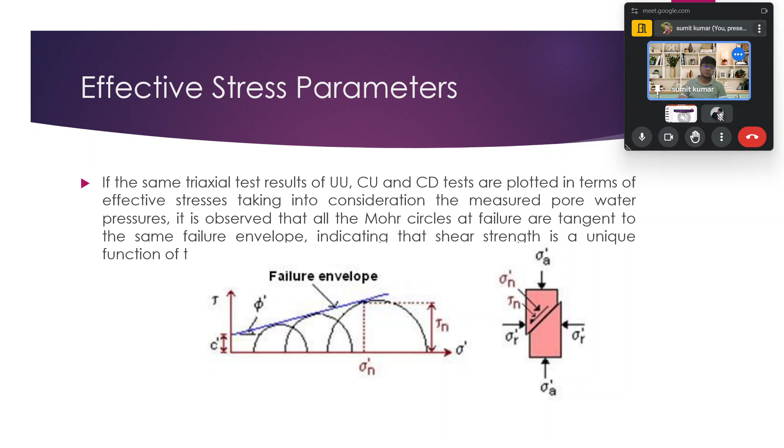Now we can see that the failure envelope is a shear strength envelope, which may then be written as tau f equal to c dash plus sigma dash tan phi dash, where c dash is the cohesion intercept in terms of effective stress and phi dash is the angle of shearing resistance in terms of effective stress.

If sigma dash is the effective stress acting on the rupture plane at failure, and tau is the shear stress on the same plane, then the relationship between the effective stresses on the failure plane is sigma 1 dash equal to sigma 3 dash into 1 plus sin phi by 1 minus sin phi, plus 2c dash root under 1 plus sin phi by 1 minus sin phi.

It can be said in another way as well. We can say sigma 1 dash equal to sigma 3 dash tan square 45 plus phi by 2, plus 2c dash tan 45 plus phi by 2. So when you use trigonometric skill to convert 1 plus sin phi by 1 minus sin phi, you find tan square 45 plus phi by 2. Similarly, when you convert root under 1 plus sin phi by 1 minus sin phi, you find tan 45 plus phi by 2.

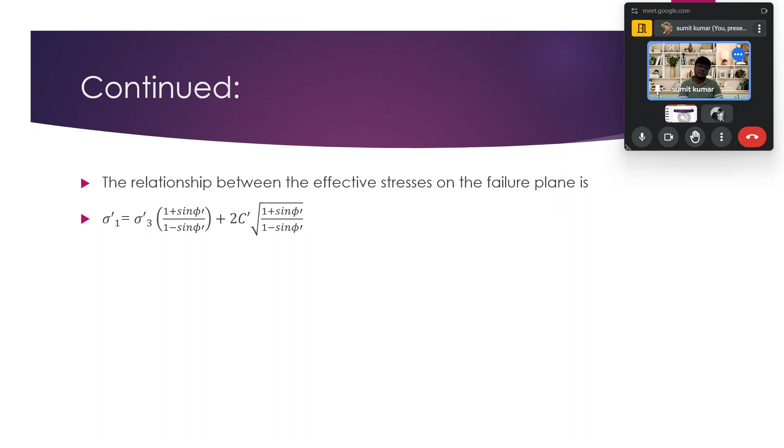That is the most important equation for the triaxial test, to find the shear strength parameters when the interrelation between c dash and phi dash has been given.

Okay, now we move forward. We see the pore water pressure parameter. And what is the pore water pressure parameter? That is what we are going to discuss.

The difference between the total and effective stress is simply the pore water pressure. As we have discussed earlier as well, the difference between total stress and effective stress is the pore water pressure. As we know, effective stress is equal to total stress minus pore water pressure. So that is the case.

Consequently, the total and effective stress Mohr circles have the same diameter and are only separated along the sigma axis by the magnitude of the pore water pressure. It is easy to construct a series of total stress Mohr circles, but the inferred total stress parameters have no relevance to the actual soil behavior.

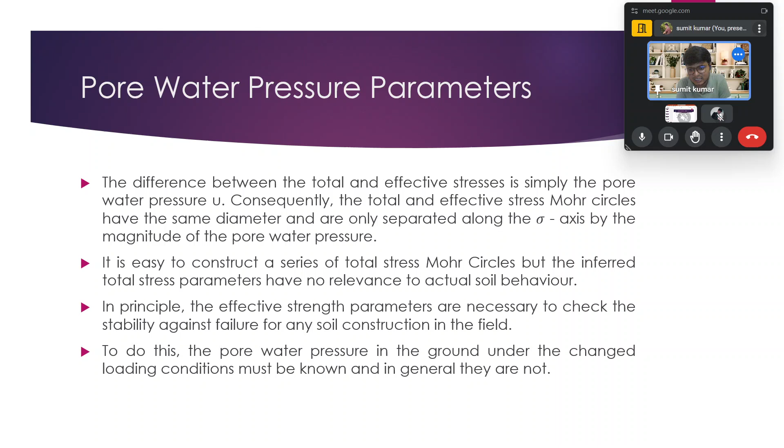In principle, the effective strength parameters are necessary to check the stability against failure of any soil construction in the field. To do this, the pore water pressure in the ground under changed loading conditions must be known. And in general, as we are not aware about that, so that is one of the contradictions.

In an undrained triaxial test with pore water pressure measurement, this is possible, and the effective stress can then be determined. Alternatively, in the drained test, the loading rate can be made sufficiently slow so as to allow the dissipation of all the excess pore water pressure. For low permeability soils, the drainage will require longer times.

In the undrained test, the general expression relating the total pore water pressure developed and the changes in applied stress for both stages is delta U equal to delta U1 plus delta U2, equal to B into delta sigma 3 plus B into A into delta sigma 1 minus delta sigma 3, equal to B into bracket delta sigma 3 plus A into delta sigma 1 minus delta sigma 3.

Delta U1 is the pore water pressure developed in the first stage during application of the confining stress delta sigma 3, and delta U2 is the pore water pressure developed in the second stage during application of the deviator stress delta sigma 1 minus delta sigma 3. B and A are the Skempton pore pressure parameters.

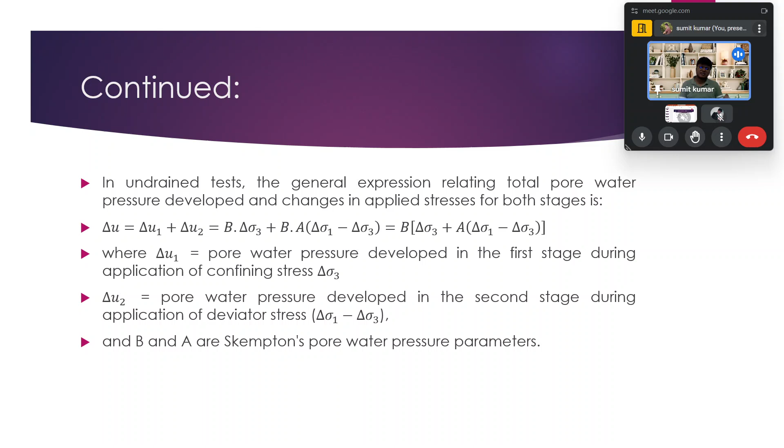When I talk about skill set, we see that while performing in the lab, you have all the theoretical knowledge, but if the practical implementation gets missed out, it will lead to a greater problem.

The parameter B is a function of the degree of saturation of soil, equal to 1 for saturated soil and equal to 0 for dry soil. The parameter A is also not constant; it varies with the over-consolidation ratio of the soil and also with the magnitude of the deviator stress.

The value of A at failure is necessary in plotting the effective stress Mohr circles. Okay, is this clear?

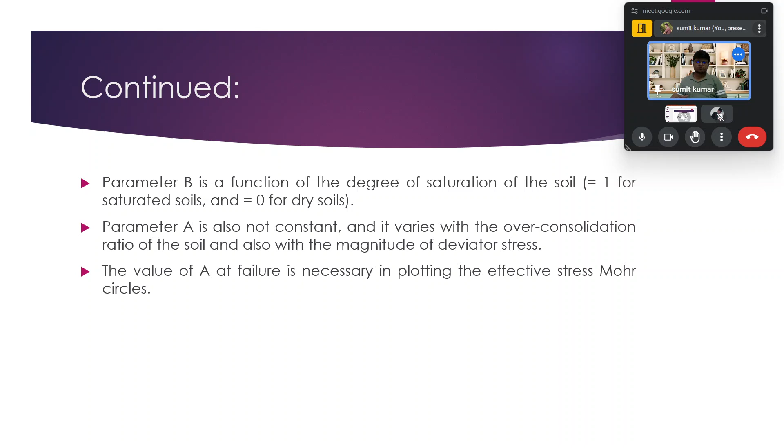Let's go. When we talk about the behavior of the saturated soil sample in the undrained triaxial test, in the first stage, increasing the cell pressure without allowing drainage has the effect of increasing the pore water pressure by the same amount. Thus, there is no change in the effective stress during the second shearing stage. The change in the pore water pressure can either be positive or negative.

That's not the difference. For the UU test on saturated soil, the pore water pressure is not dissipated in both stages, that is delta U equals delta U1 plus delta U2.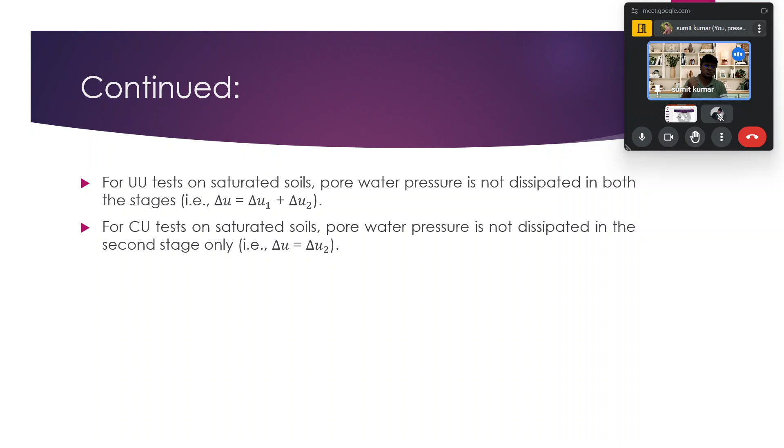For the CU test on saturated soil, the pore water pressure is not dissipated in the second stage, that is delta U is equal to delta U2, because in the CU test on saturated soil, the pore water pressure develops only in the second stage, so delta U is nothing but delta U2. Clear? I think so.

Now I will talk about the stress-strain behavior of soil. Sands are usually sheared under drained conditions as they have relatively higher permeability. This behavior can be investigated in the direct shear or triaxial test. The two most important parameters governing their behavior are the relative density ID and the magnitude of the effective stress sigma dash.

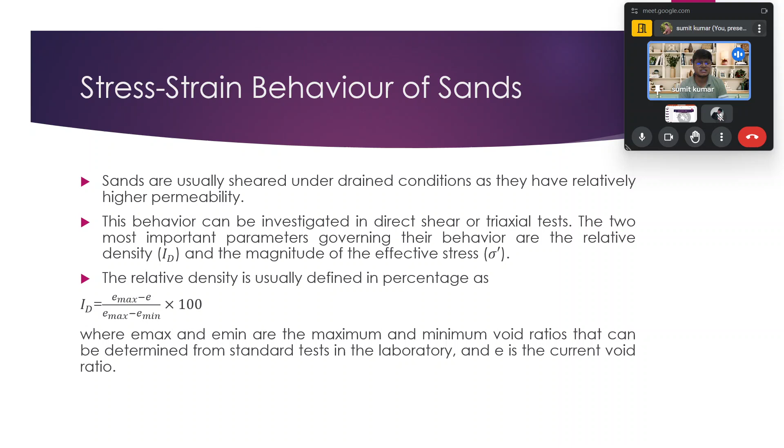The relative density is also given in terms of density.

So relative density is gamma d minus gamma d min, divided by gamma d max minus gamma d min, multiplied by gamma d max by gamma d, into 100. This gives the percentage. Here, gamma D max and gamma D min are the maximum and minimum dry density, and gamma D is the current dry density. Sand is generally referred to as dense if the relative density is greater than 65%, and loose if it is less than 35%.

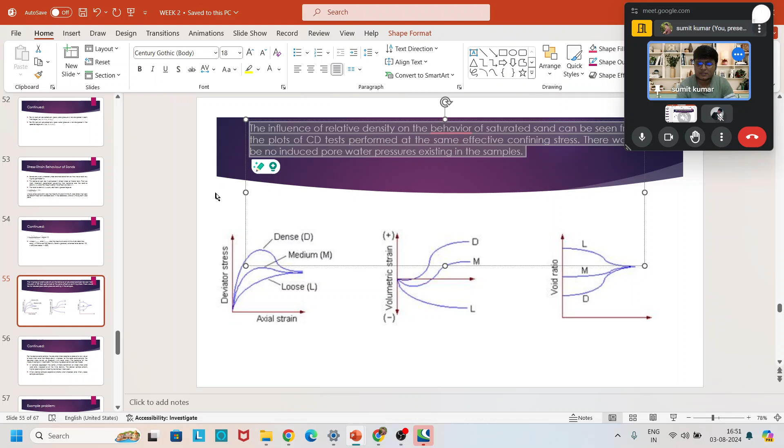One more point to refer from here: I am talking about the influence of the relative density on the behavior of saturated sand, which can be seen from the plot of the CD test performed at the same effective confining stress. There would be no excess pore water pressure existing in the samples.

Now, when we look at that image in succession, for the dense sand sample, the deviatoric stress reaches a peak at a low value of axial strain and then drops down. Whereas for the loose sand sample, the deviatoric stress builds up gradually with axial strain. The behavior of the medium sample is in between.

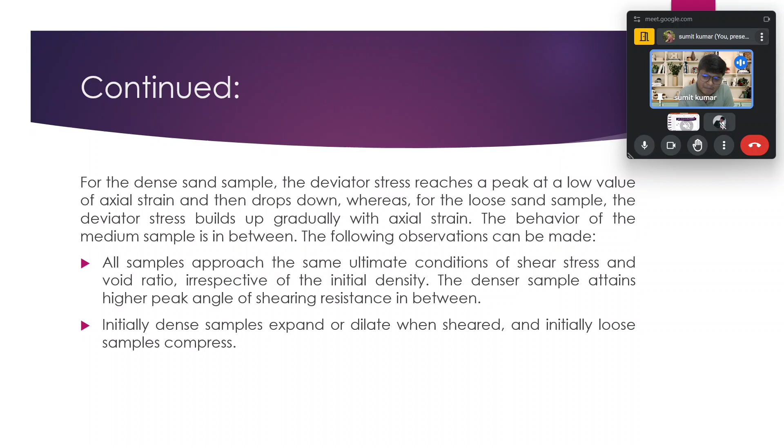The following observations can be made: all the samples approach the same ultimate condition for shear stress and void ratio, irrespective of the initial density. The denser sample attains a higher peak angle of shearing resistance. Initially, the dense sample expands or dilates when sheared, while the loose sample initially compresses, as represented in the diagram in the last slide.

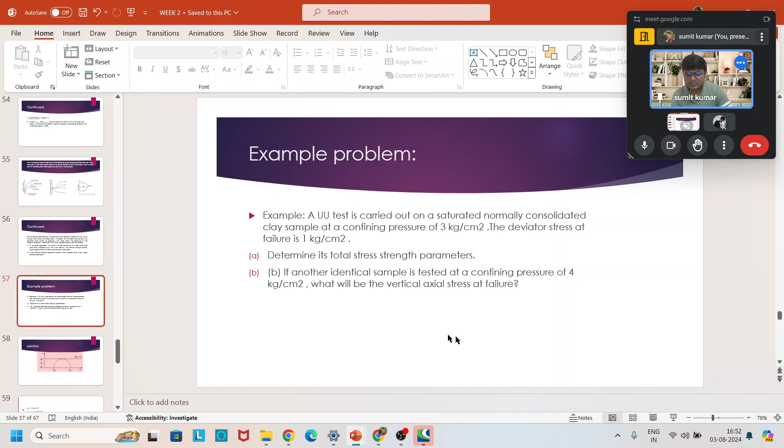Now we will solve the example problem. You can see the first example problem in front of you. Okay, I think the slide is now visible. See, so here the question is given.

A UU test is carried out on a saturated, normally consolidated clay sample at a confining pressure of 3 kg per cm square, and the deviatoric stress at failure is 1 kg per cm square. The question is to determine the total stress strength parameters, and the second part is: if an identical sample is tested at a confining pressure of 4 kg per cm square, what will be the vertical stress at failure?

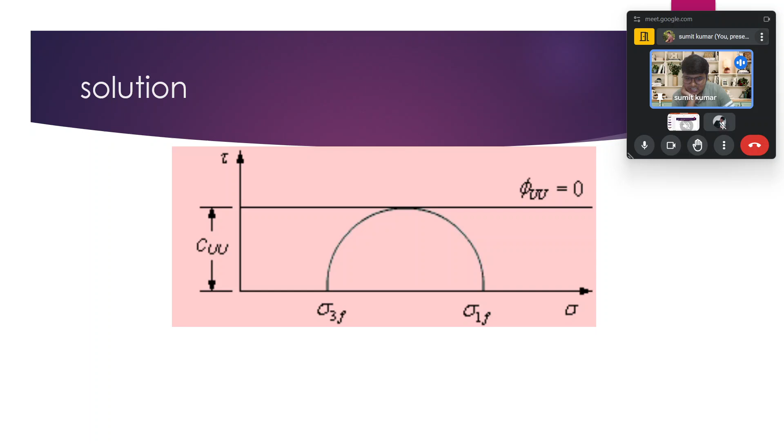We are aware of this image, where cohesion is the intercept on the y-axis, and sigma 1 and sigma 3 relate such that phi equals 0. So in the first part of the problem, sigma 3 is given as 3 kg per cm square, so sigma 1 minus sigma 3 is 1 kg per cm square, and from the plot on the last page, phi uu equals 0. So cuu equals sigma 1 minus sigma 3 by 2, that is 0.5 kg per cm square. I think you have understood this concept from the definition discussed earlier when covering the UU test.

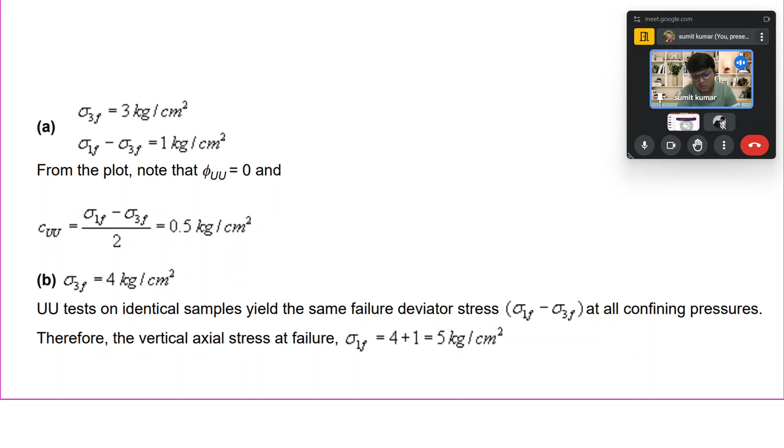Okay, now for the second part of the problem, sigma 3 is 4 kg per cm square. The question asks, if the confining stress is 4 kg per cm square, in this UU test, the identical sample yields the same failure deviatoric stress, sigma 1F minus sigma 3F, at all confining pressures. Therefore, the vertical axial stress at failure, sigma 1F, equals 4 plus 1, that is 5 kg per cm square. I think this will be clear.

Now we will take the second question quickly. The results of tests conducted on two saturated clay samples are given; determine the shear strength parameters. For sample 1, the confining pressure is 4.8 kg per cm square, and the axial stress at failure is 6.8 kg per cm square, with pore water pressure at failure of 3.8 kg per cm square. Similarly, for case 2, 6.3, 9.3, and 4.8 are the confining, axial, and pore water pressure at failure respectively.

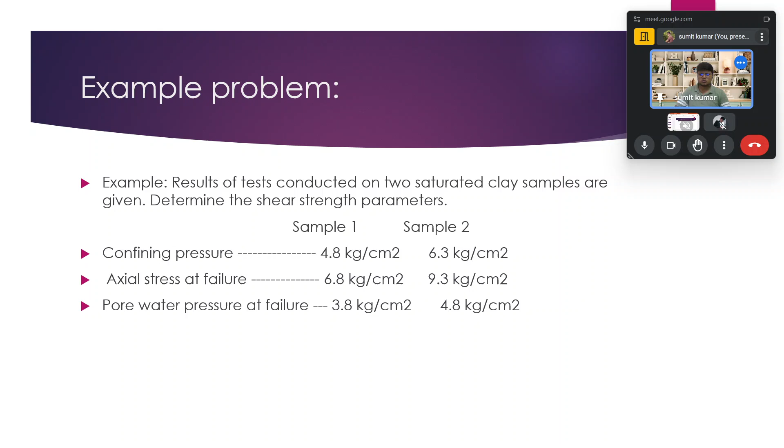Now we will move ahead and see what we understood in today's lecture, since we have gone across the entire session. There is some understanding you must carry from this session.

First, at the start of the class, we had a quick recap of the last class, discussing briefly in the first 5 to 10 minutes what we covered during the last lecture. We concluded that during the last lecture we covered various aspects of shear strength, and we understood shear strength.

After that, we learned about the triaxial test briefly. Then we moved to the Mohr circle, and how we solved problems using it. In the last class, I also gave homework to solve the same four problems provided in the slides, plus some additional problems from the books, and I gave the book references at that point.

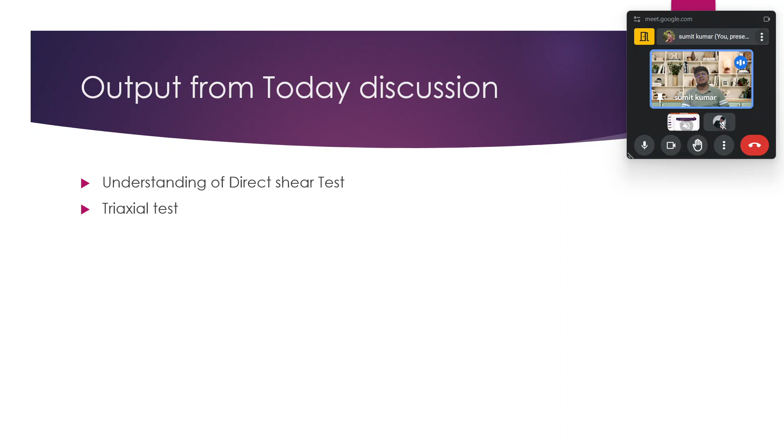Today, the main aspects we understood are the direct shear test and the triaxial test, though some more detail is still due, which we will cover in subsequent classes. So the understanding of the direct shear test and the triaxial test has been developed for us.

Now some questions you need to answer if the lecture has gone the right way. First, the simple problem: what is shear strength? This was also covered in the last class. Please write this down, and also write the detailed procedure of the direct shear test, since the procedure was discussed during this class, and the same for the triaxial test.

If you are a college-going student, please try to perform these two tests if the apparatus is available in order at your institution. Theoretical knowledge is one thing, but when you go perform the test in the laboratory, you will get more idea, and you may get some doubts as well, which you can ask in the next class, and I will try to answer those.